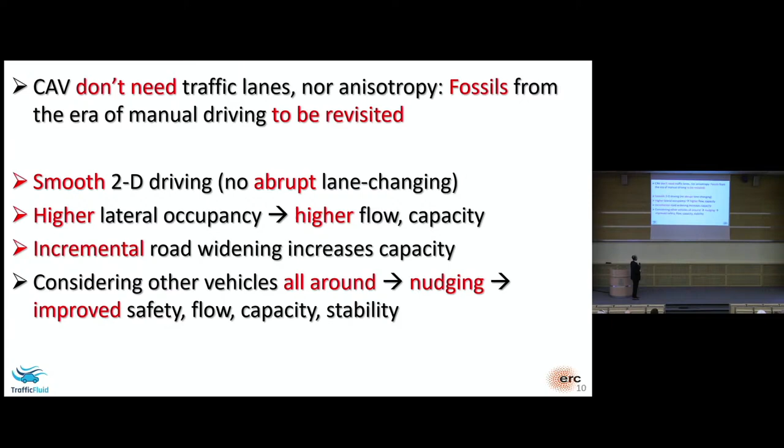Now, we know from physics that in any fluid, the macroscopic behavior depends on the microscopic behavior of the particles, right? If the particles behave differently, you have a different fluid. And this is also the case for traffic. So, if we can isotropically let the particles move, there are many different ways of making them move. And every different way will give rise to different emerging macroscopic flow characteristics. And so a research question is, what is the microscopic movement strategy that optimizes, in some sense, the macroscopic behavior of the traffic flow?

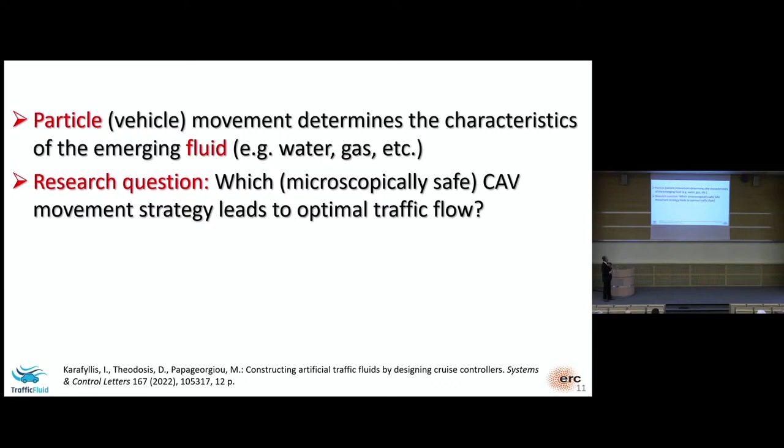So in my field, so far, a big part of our activity was to model traffic. That means to try to understand, to describe with equations, the traffic flow as an external physical phenomenon. But under this light, we can change attitudes and try to design the traffic flow via appropriate design of the microscopic movement of the particles. Of course, we have constraints in this endeavor, but such constraints should not include arbitrary, non-useful constraints like lane-based driving or anisotropy.

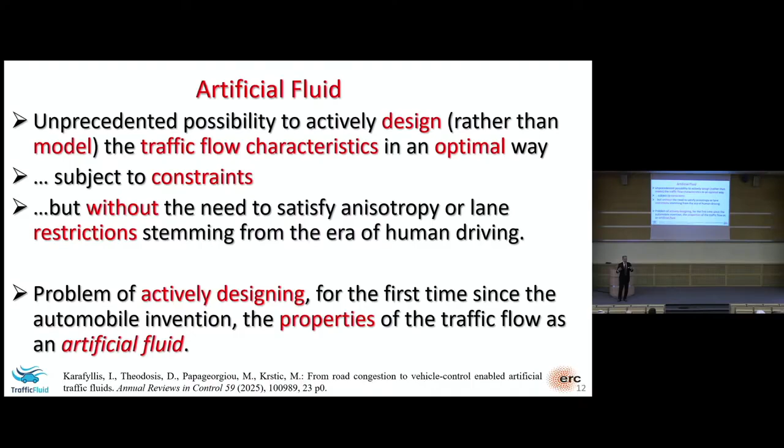And in that sense, we can say that we have the possibility to engineer, to design the traffic flow, and in that sense, we can even talk about artificial traffic flow. Artificial in the sense designed, not something that we describe only because it happens like this, but we design it to happen in a specific way.

Okay, this is less interesting for a general audience. What kind of research work needs to be done? A lot of work to design individual vehicle movement in such an environment using different approaches. Then looking at the macroscopic aspect of whatever we have designed and have an interplay to see how we can achieve a better macroscopic behavior, and last but not least, also look at traffic management aspects under this new paradigm.

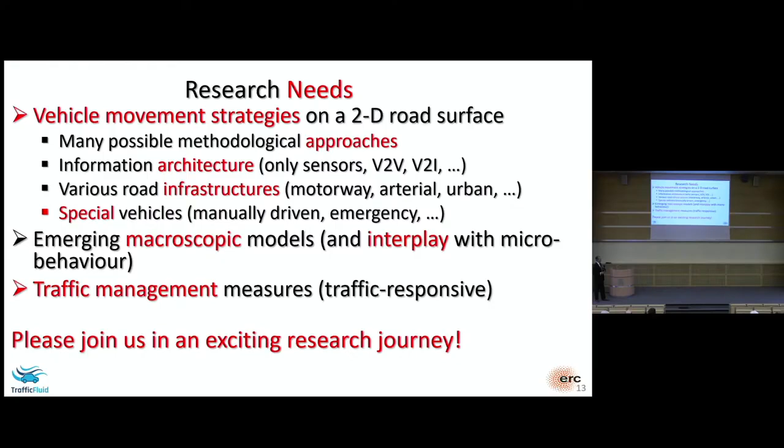Now, in some very preliminary research, even before the project had started, we had an ad hoc strategy for lane-free vehicle movement with nudging, and we applied it to vehicles driving on a ring road with a width of 10.2 meters, which is roughly 3 not very large lanes.

The idea is when density is 0, of course, flow is 0. When density increases, you push more vehicles on the highway, the flow increases, but this happens up to a certain point, which is the capacity. Then, if you push even more cars on the road, the flow starts decreasing.

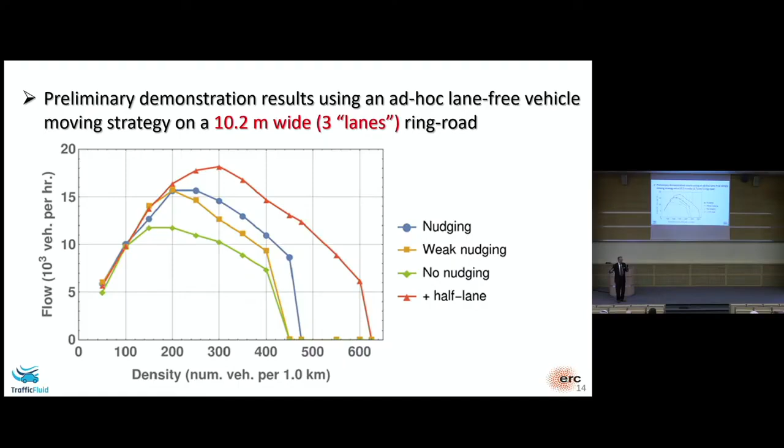And if we add half a lane, meaning if we add 1.7 meters width, we get proportionally additional flow and capacity. Meaning that in lane-free traffic, the vehicles will spread when they have even a few centimeters of more space. Distances between them will increase, speeds will increase, and so you get a higher flow and a higher capacity.

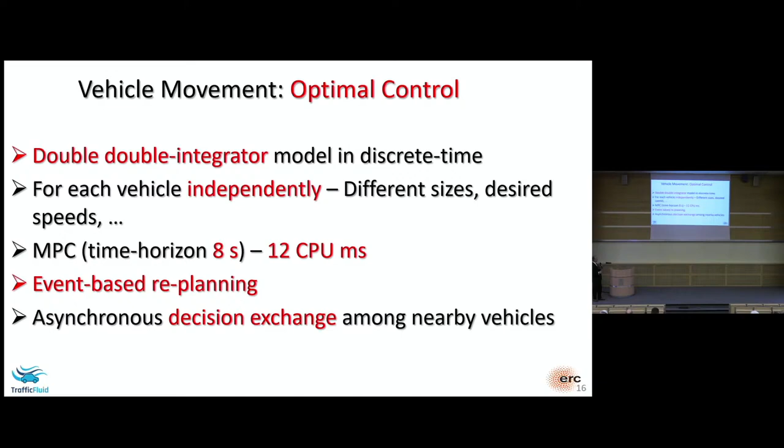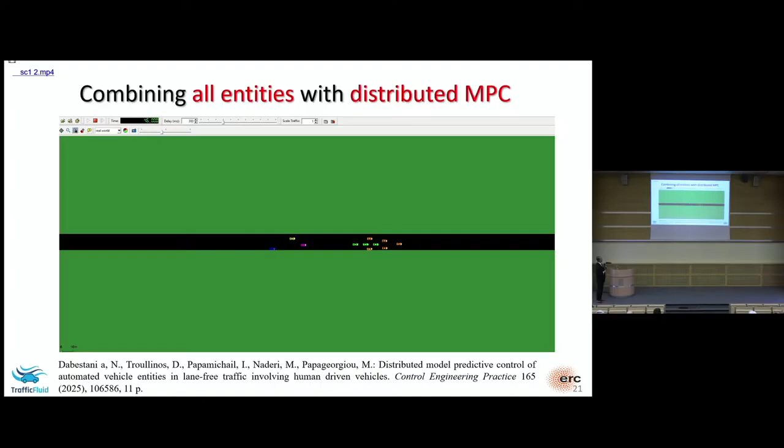Let me skip that for the sake of... yes, this was a case, let's play this. This is a case where you may have more than one groups driving together. And of course, very important, avoiding collisions. Oh, it didn't start? Anyhow.

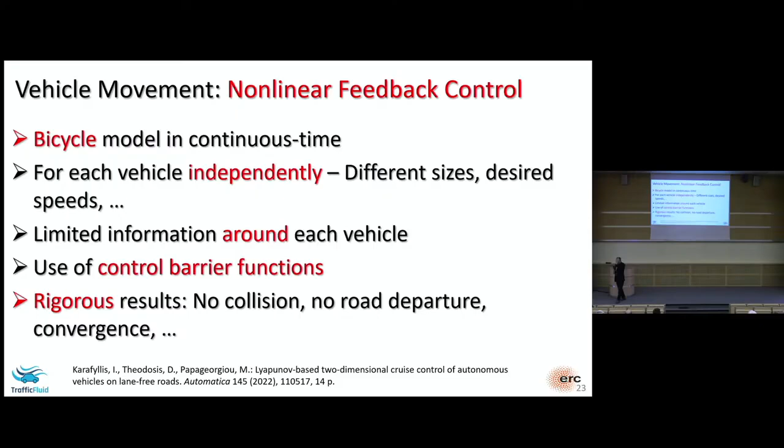Now, similar things can be done with different methods. This is less interesting for an audience that is not specialized. Nonlinear feedback control is another possibility that gives us some advantages, some disadvantages.

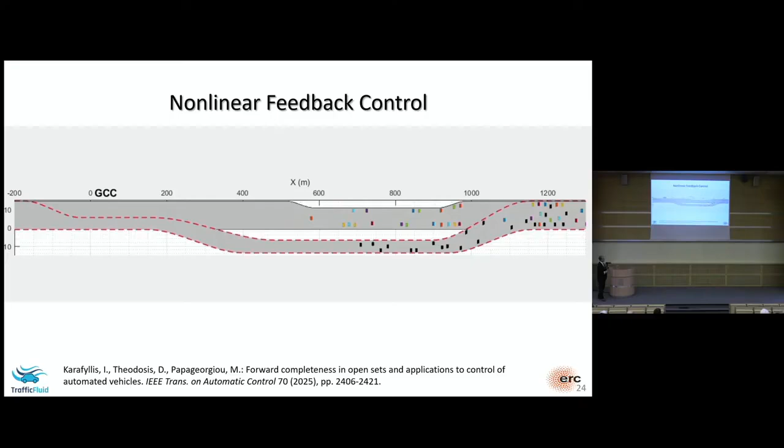You see here under a different feedback control concept, vehicles driving, some of them, the black ones, they exit here from the off-ramp, as you see, very swiftly and safely, and then they rejoin here. We have even a narrowing of the mainstream roads. Then they join again, guided, each one independently by its own feedback control strategy.

Now, let's see a highway with an on-ramp, which can cause a congestion. If you have a lot of traffic on the highway and a lot of traffic coming from the on-ramp, usually you will have a congestion created here and spreading back. This is everyday phenomena in traffic.

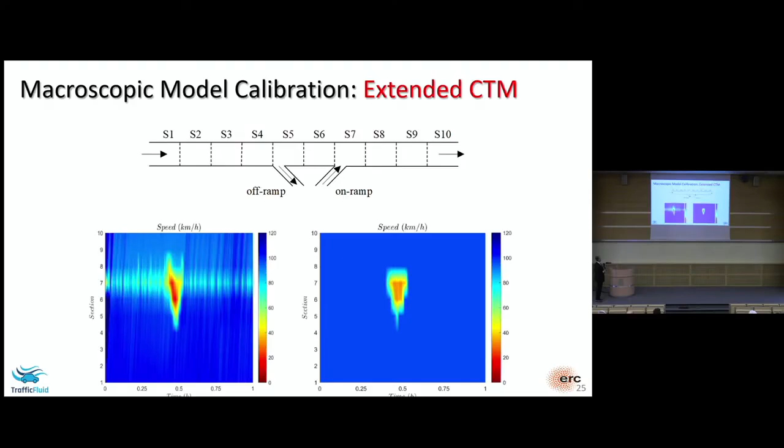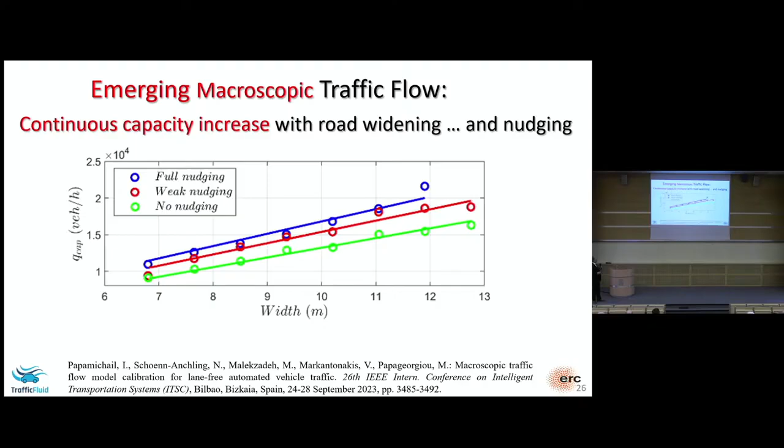If you look at one of these lines, you see that the capacity increases for every meter, actually every centimeter of widening of the road. So you can widen the road by a little bit, and then you get the corresponding increase of capacity. And the different lines are for different nudging strengths, which also, as we said, improves flow and capacity.

But now the idea is that we can have an internal boundary that is a function of space and time. So we have an internal boundary that can change virtually based on a control strategy, depending on the traffic conditions, over space and over time, so that traffic is optimized on both directions. In other words, if you need more capacity in one direction than the other, which is very often the case, or if you need more capacity in some spots of the road than in others because of on-ramps, off-ramps, and so on, then this strategy would do it automatically.

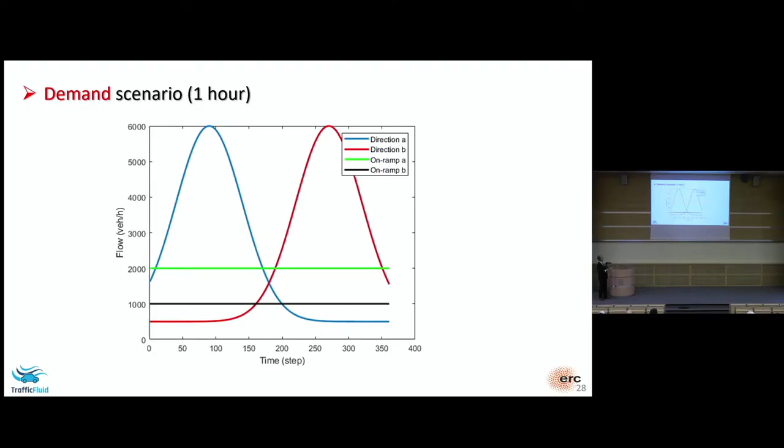And then we feed these with a demand that looks like this. This is time, and this is the entering demand. So first, in direction A, you have a very strong demand. Then in direction B, you have a very strong demand. And the constant demands are the demands of the on-ramps.

And so if you do that, and at the same time you control the internal boundaries, you get something like this. Here now, the entering demand is very high here. You start having congestion in the no control case, but no congestion in the control case because the boundary has moved upward, right? So here you still have free flow rather than having this queuing there.

And then you get the higher demand in the other direction. So in that case, the internal boundary optimally should move downwards, which is what it does, because otherwise, like in the no control case, you will get a congestion exactly here that spreads backward.

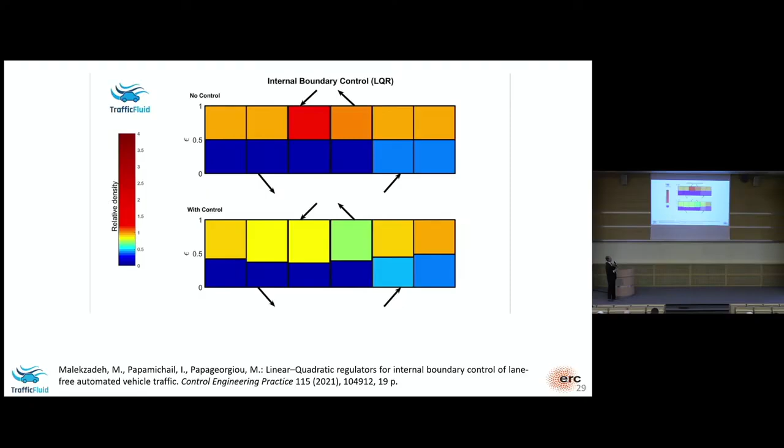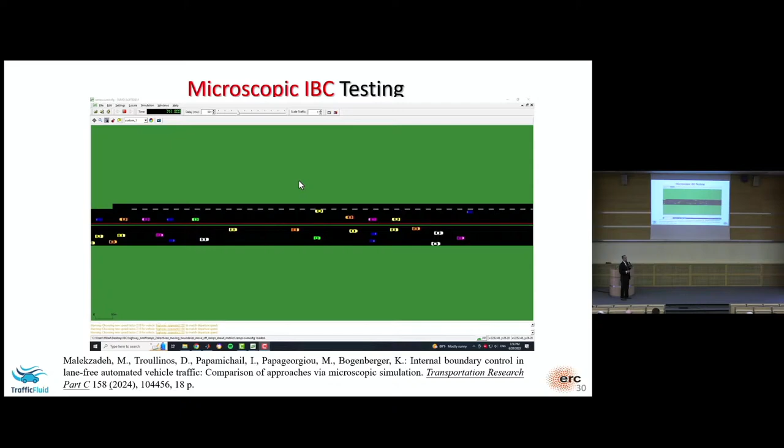And the boundary separates such that you have, if possible, free flow on both directions, while otherwise, of course, you would have congestion in one direction.

But there are also infrastructures that are lane-free today. I'm sure most of you have been already in Paris, and you know this Arc de Triomphe monument in the Place Charles de Gaulle. From a traffic point of view, this is a very unique infrastructure. Why? Because it has a width of 38 meters, like 12 lanes, the width, right?

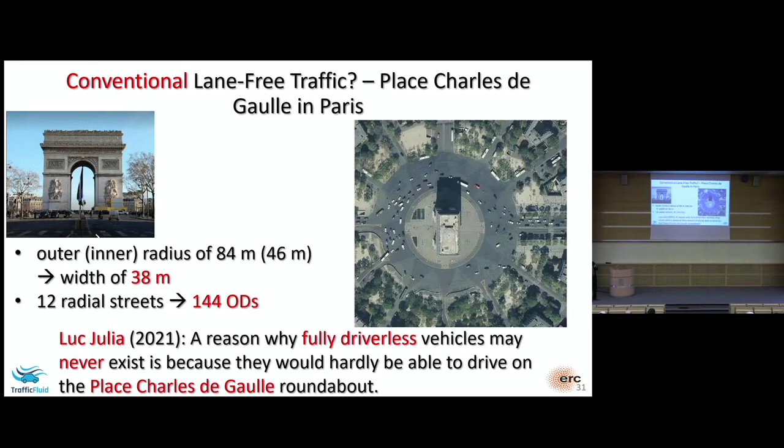And in fact, in a very insightful keynote presentation at the conference, Luc Julia, who is an icon, French origin but in America, icon in AI and autonomous vehicles, said there are 2 reasons why he thinks a completely driverless vehicle may not exist. The first reason is also funny, but we keep it for the discussion if you want. The second reason was that he thinks no autonomous vehicle would be able to drive in this infrastructure. And since we were already working in this lane-free project, we thought, okay, let's prove him wrong.

And indeed, we used one of the designed movement strategies for vehicles that are driving on this infrastructure. Different colors mean different destinations, so we can guarantee that no vehicle will miss its destination. There is no crash, and there is quite a good efficiency in terms of throughput of these vehicles.

But there is another lane-free infrastructure which is much more common, and this is urban intersections. The intersection area has no lanes, and it makes sense that it has no lanes. So, what about having also no signals? In this case, we may have a joint optimal control problem, joint for all vehicles that are crossing. So having sort of a big brother that tells vehicles what to do. Of course, you can do it also decentralized, but our first approach was joint optimal control. And then you can have vehicles with all possible ODs crossing all the time without traffic signals.

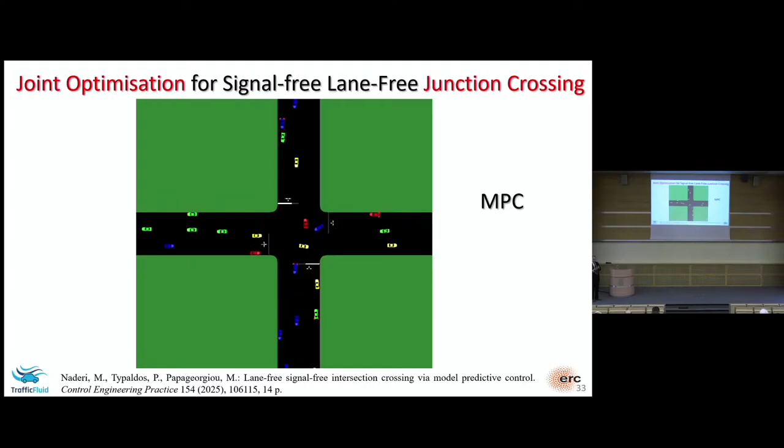And of course, this has a huge advantage compared to today's intersections in the sense that you can double capacity, but even more importantly, you nullify delay, because in today's intersections, even if you don't have a lot of traffic, you have red signals. So you have to wait in front of red signals, start again, which means fuel consumption, pollution, and delay. While here, as long as you are below capacity, which is doubled, there is no delay at all. All vehicles are crossing virtually without any delay.

And you can even improve that. Oops, sorry. You can improve that by considering not just individual vehicles, but also platoons, which can also behave like before on the highway, cross, interrupt where needed.

And of course, we have all those nasty pedestrians and cyclists. What are we going to do with them? Well, for the price of reduced throughput, you can also consider cyclists and pedestrians, which are simulated here. Cyclists and pedestrians can be sensed, but cannot be controlled. So the idea is that they go the way they want to go, and it is the vehicles that take care of them, in the sense that they keep a distance from them while crossing, and they do anything that is needed for that, like you can see in this video.

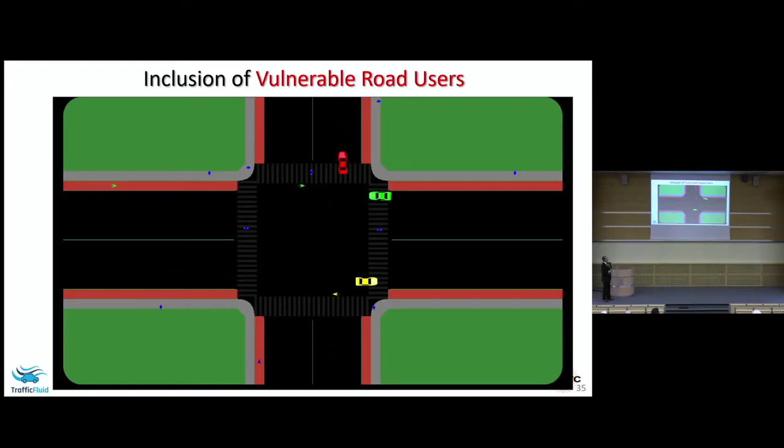So I hope it was not too long. I hope you got an idea of how traffic in future might look like, and if you are interested, you can have a look at our website for more information about this project.